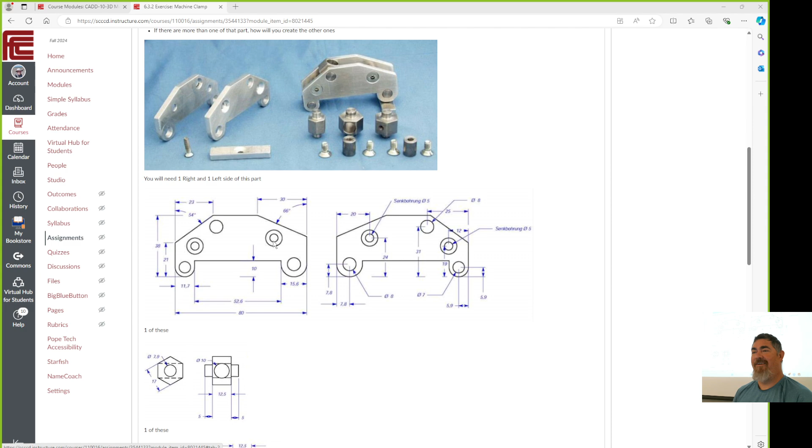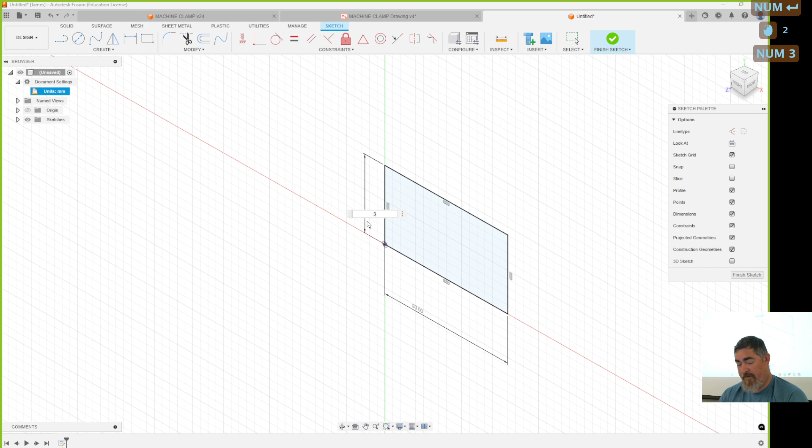So the way I did this, create a sketch, a rectangle. Oops, let me change my settings. And I'm going to make it my 80 by 37 or 38, right? Finish, extrude, 5, component, right? I do that. Create rectangle 10, that 15.6, 11.7.

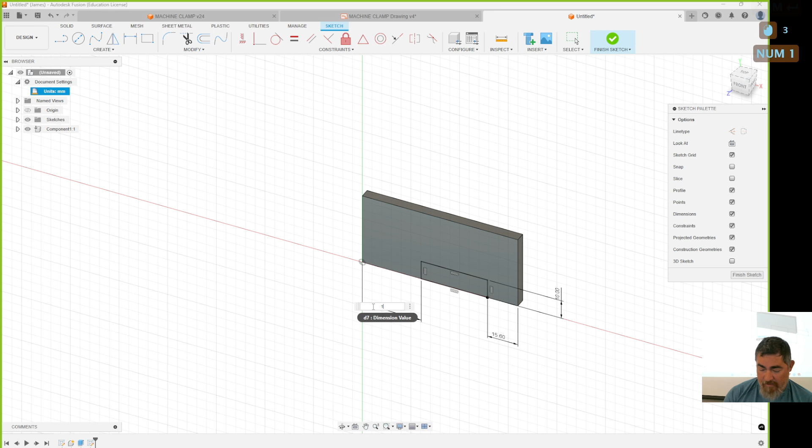Cut that out, right? I did those measurements because those control the radius, and I figured that was more important than just the gap. Even though the gap was a round number, this is the same as the radius of those curves. So I kept those two. And now I'm just going to draw in this. Why do you think I'm drawing it not using the chamfer command?

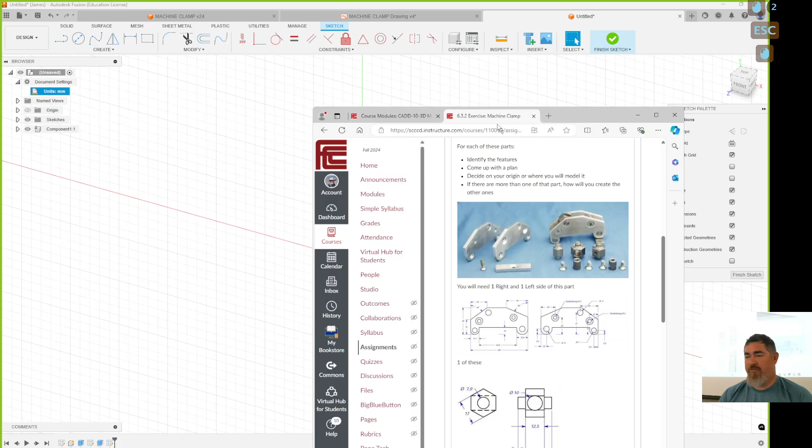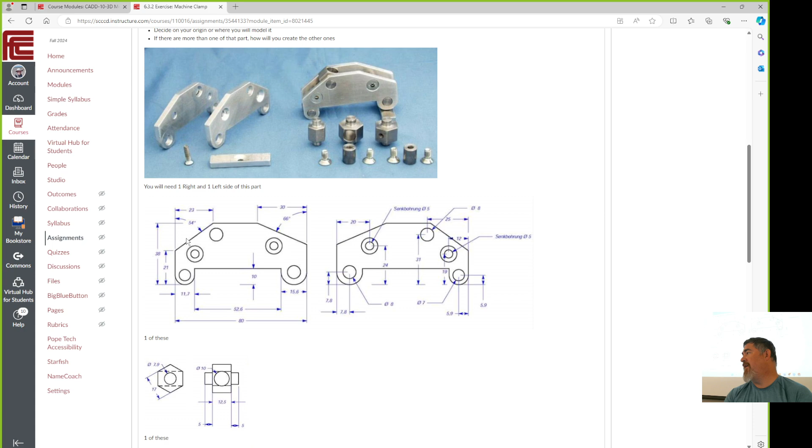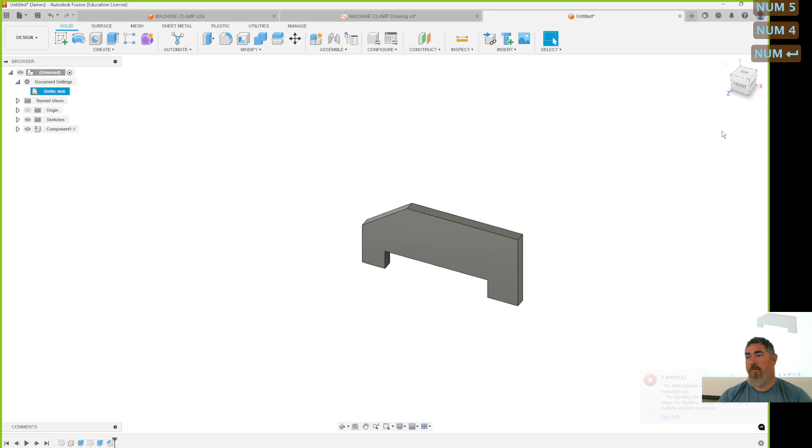The chamfer command, the angle is from the side that's measured down. This one, the angle measurement is the opposite side. But I could always just subtract it from 90, right? So I should just do that. Just go in, chamfer, here, distance angle. So to go in the 23, and the angle to be 90 minus 54. That's not math. I'm using the number it told me, I'm just doing it.

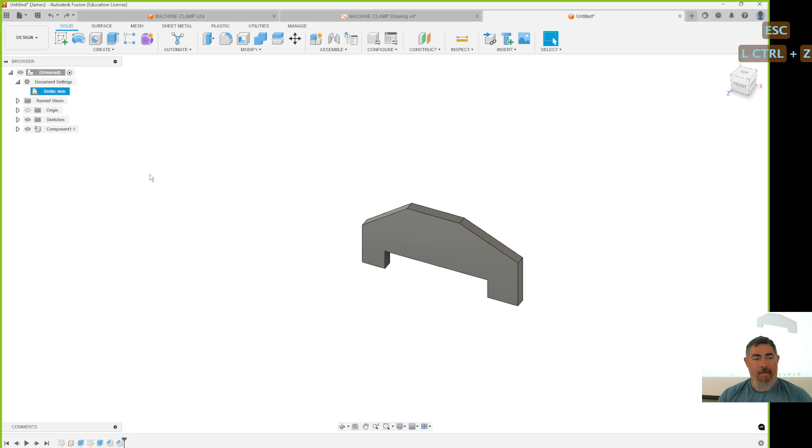Flip the direction. 30, 90 minus 66. So if I measure there to there, create it on here, dimension, there's my 66. That's the same one that's on the drawing. And now, I'm going to throw the holes in there.

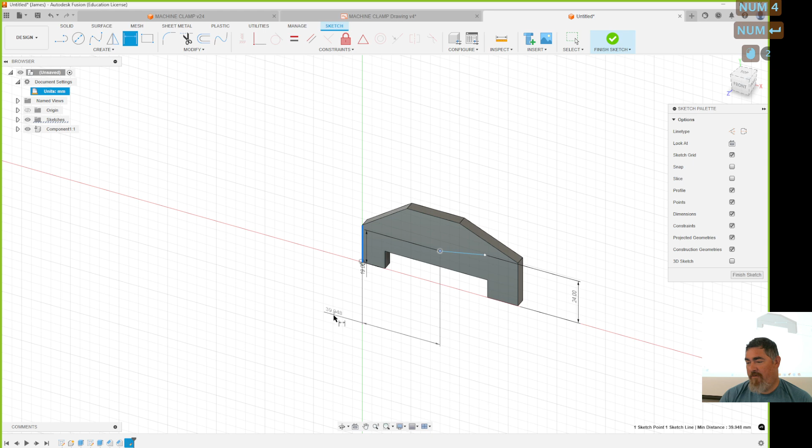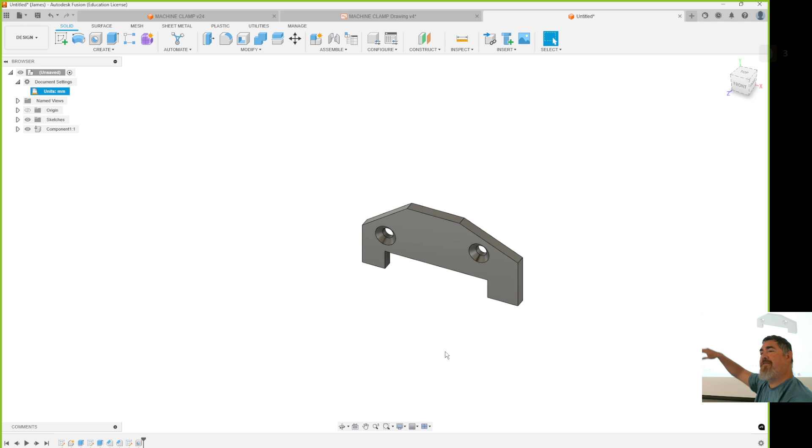It's from up there to down there. Now I can just dimension this one to be my 19. That one to be my, I know you can't see the drawing, that one to be my 12. That one to be my 20. And then I can throw in those. Countersink, clearance, M5, all the way through. Right? Easy to dimension from the flat surface, right? And just leave those off.

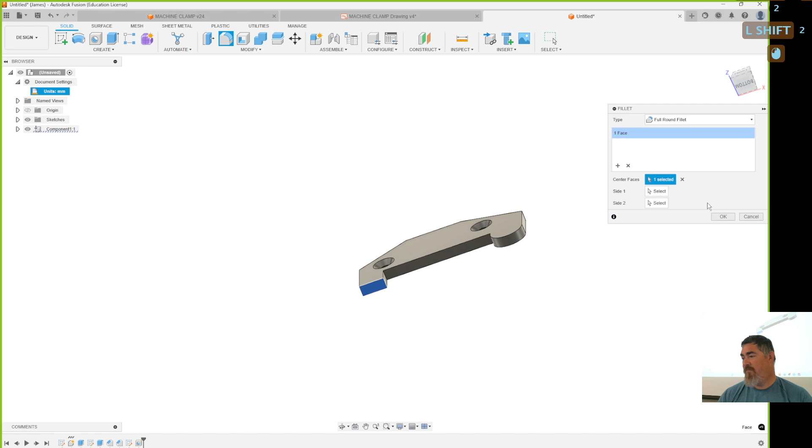Because if you remember back before, I've said I'll draw the outside, draw cuts, do whatever, then I'll add holes, and then I do fillets, right? Look. Boom. Fillet's done. After I've already added in all the holes. Yep. Yeah, and I actually did. I made all the holes first and then did that. Just saving time. But yeah, I would have made all of those holes first and then done the fillets.

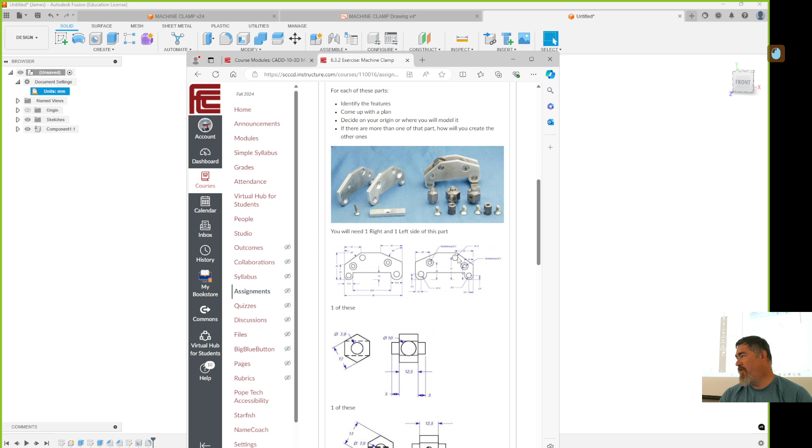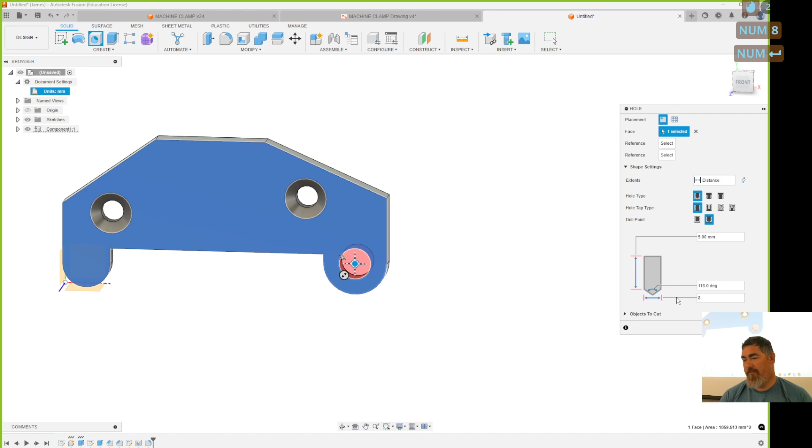I mean, except for these two here, because these two need to be concentric, right? And so I do all the holes up here. So I do these two holes, do that hole, add the fillets, and now I can go in until that hole there is on the face, right? Then pick the edge, so to be a regular clearance hole, or I think it was just a regular hole there, and that was supposed to be 8, right? Then I do another hole for here, concentric of that, and that one's the 7.

So do these 3 holes first, then do the fillets, then put in those 2 holes, so that way they're concentric. So that's kind of my flow. But you see, each of those steps was pretty easy. So remember, make your plan, revise it. Like, is this really the easiest way to do it, or is there something that's going to be a hiccup along the process?

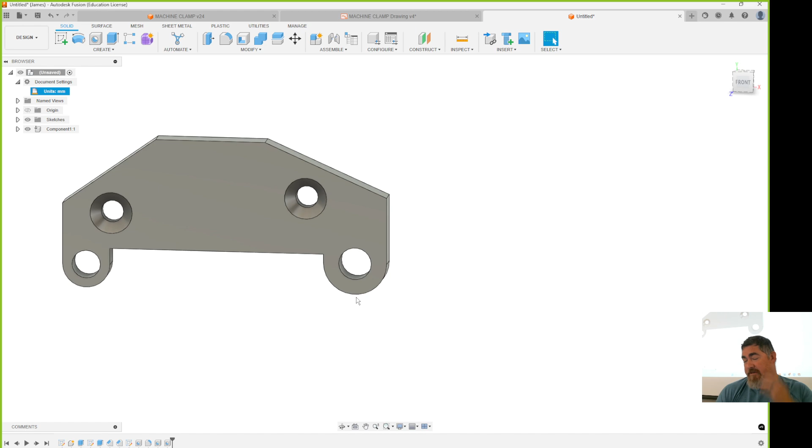I mean, it's not easy, but it's possible to create that hole at a point there, and then dimension from there. Oh, if I do the tangent, it's going to be over there, right? So then I have to draw a construction line down here. Then I can dimension from that to there. Or, what else could I do instead of drawing that construction line?

Yeah, I also have my origin right here, right? My origin is lined up on the bottom. I can go from the origin to there. I could have done that also, because the origin was on the bottom. So that's part of, remember, where's your origin going to be placed? If the origin's in the middle of the part, or the top corner, then I can't dimension to the origin down there. But if I drew it with the origin there, now I can always dimension back to that. Okay? You wouldn't draw that as center.

No, that's going from the point to the point. Because you can snap to the quadrant on the drawing, but not in the sketch. In the sketch, there's only the circle arc tangent. And that's going to be, like if I start here, dimension, I go from there, and I pick that. Now it's going to be over here. It's going to be that shortest distance tangent. You can't make a vertical dimension from there.

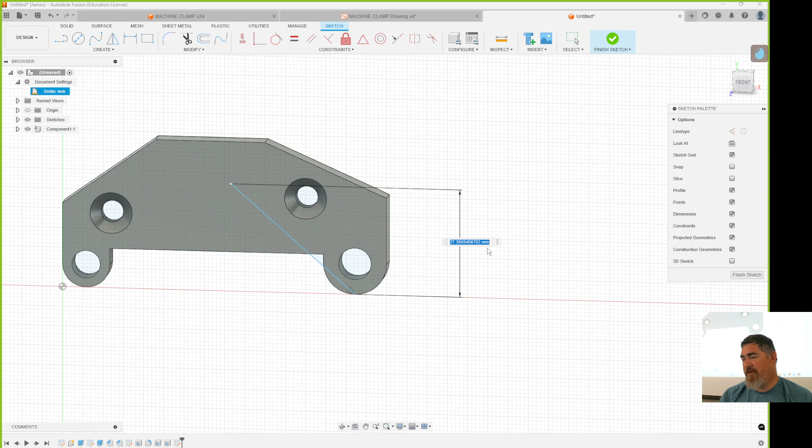But this would work also. Going from the origin, if the origin was along the bottom, would work. Drawing a construction line works. Just what extra steps do you want to do? Okay.